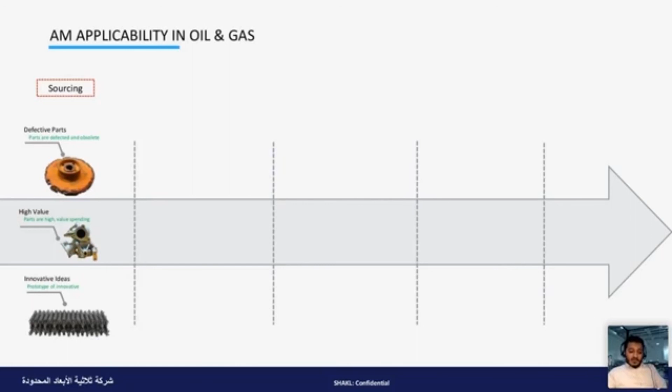and brings reliability to operation. The third item is innovative ideas, innovative solutions that the operating facilities can come up with and prototype and deploy immediately.

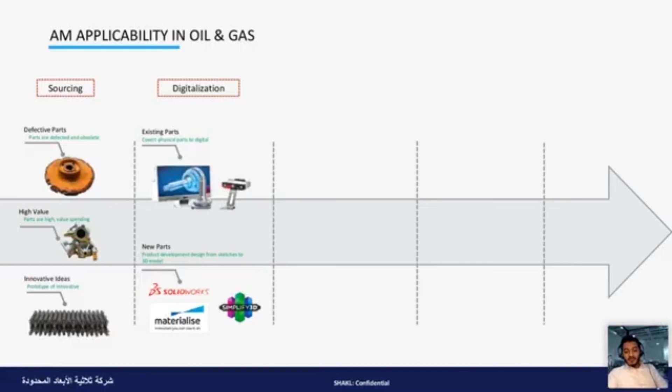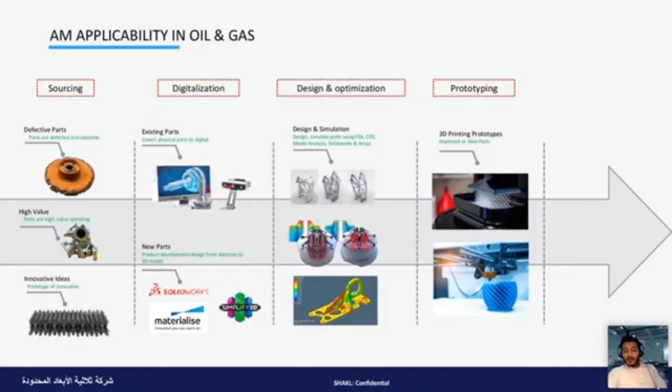Once the part identification is happening, we look at the digitalization perspective, where we scan these parts and have it in a CAD software, or we can design it from scratch if it's an idea or an invention. Also, we look at design optimization - we can apply generative design or optimize the design to be cost effective. Then we prototype these ideas with normal desktop machinery to visualize and sense the product before deployment, and finally we look at the AM fabrication of metallic and non-metallic commodity to be deployed and implemented in the field, and finally we digitize this part into the digital inventory to be produced on demand.

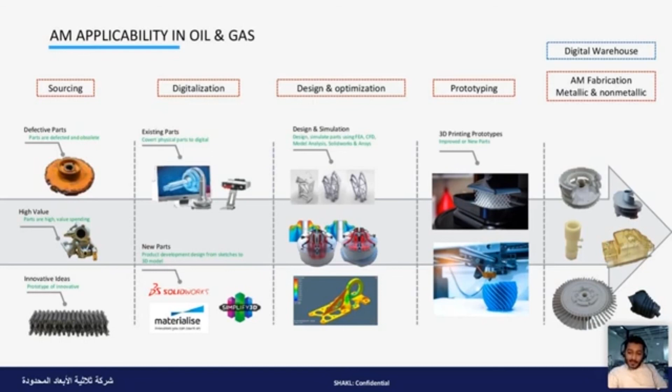Marvelous. Okay, so it's quite a lengthy chain there, really, of a lot of activity going on.

Valeria, I'm interested to hear how Aidro helps in this process, and what your approach is at your company.

Yes, indeed, we are a helper. We are helping the company to develop the digitalization and introduce additive manufacturing as a good technology to find the good solution for different problems. As I said before, we started from hydraulics, and now also we work for oil and gas and other sectors, bringing our experience from traditional mechanicals and fluidodynamics to the innovative 3D printing. And we especially work with the manufacturer.

I have a very good example to show you, because it's the example of a valve manufacturer. And I think you can see the slide.

Starting from the current inventory, what is really important is to analyze all the parts and identify which component can benefit from 3D printing. You see a typical ball valve here, very common in the oil and gas fields. And we have analyzed with the valve manufacturer which component can be redesigned and then 3D printed.

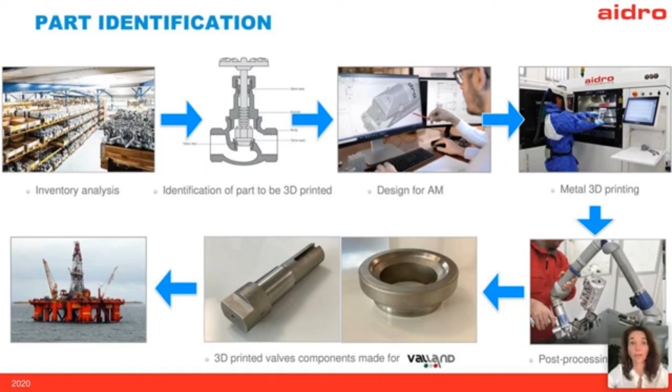So I think this can help the trust of the oil and gas company in the technology, because what is really important now is to show that the technology can work, can help, and can also be introduced without too much fear about possible cracks or defects that this technology might have.

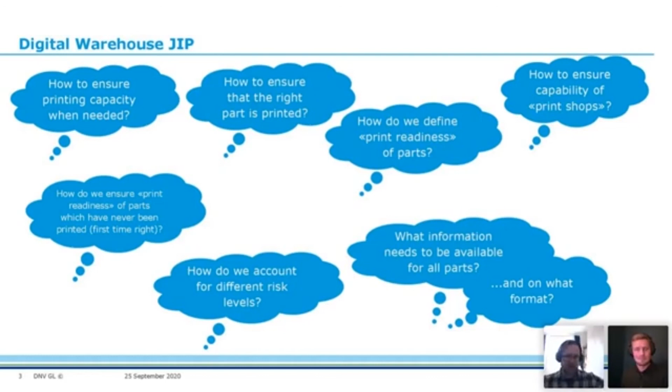Yeah, and speaking of questions, we have quite a few coming in. So let's kick off with Mohammed Youssef, who is asking, how do you pick the parts to be 3D printed? Now, who would like to tackle that question? Obviously, not everything is going to be suitable.

Yeah, Omar, I can answer that question. So there are certain requirements that you need to identify before proceeding with a 3D printing solution. You need to know what problem or what gap you're trying to bridge using the technology. Are you trying to enhance performance? Are you trying to shorten the lead time? Are you trying to prototype an innovative solution to sense and feel before mass production? Once the gap is identified, you can immediately tackle the 3D printing aspect of production.

Okay, excellent. We've got another question as well from Brian Crossy, so I think we probably should answer that question. Is one of the three types of parts, innovation, aftermarket, or high value, a particular focus at the moment? It seems to Brian that the 3D printing news is focused on aftermarket at the moment, but is that correct, do you think, or is it innovation or high value aftermarket? Which one is the current focus here?

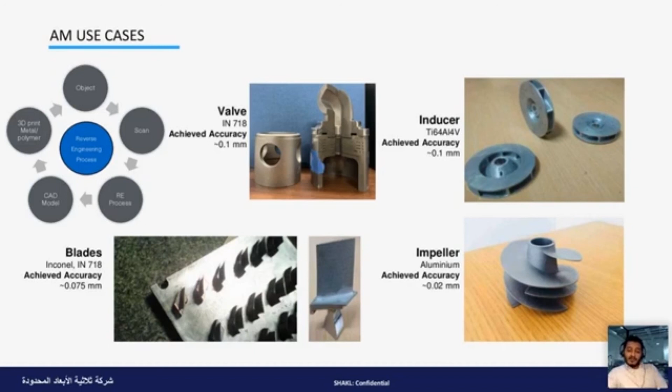So these are some of the few examples being deployed, and it's really spreading at a high scale, such as the inducer, the impeller, and the turbine blades. Yes, so these are real, serious, critical components you're actually talking about.

Valeria, do you have some examples you can show us of how Aidro are working here? Yes, I have two examples. The first one was made during the first joint industry project last year. This is a crank disc made for Kongsberg, for vessels and drilling vessels.

The idea was to test if 3D printing can produce, in a very fast way, a part that can be replaced in an old system, in this case an old thruster. We were surprised by the results because we were able to print it in only 1 week instead of almost 8 to 10 weeks of conventional manufacturing. This was a very good example because the part was made in Inconel, so it is quite heavy, but it generates the possibility to repair the old system very fast.

And the fact that we printed the part, we also have the digital file. So we can think for the future to put in stock only a digital file instead of physical parts. This means a lot of cost saving and, of course, reduction of parts in the warehouse. So this is a very good example of oil and gas parts.

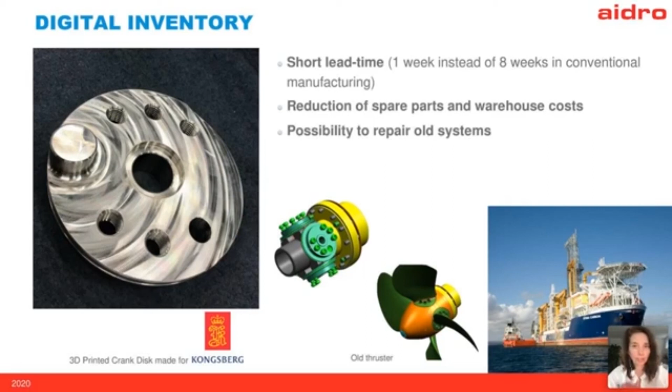And I have another part - I have to tell you that this case is a one-to-one copy of the conventional part, so in this case there is no redesign. The aim was only to replace the conventional part. Now I have a good example of a part that was redesigned.

This is a hydraulic manifold, hydraulic valve. In this case, the body of the valve is made in 3D printing in stainless steel 316L. The idea is to have the file in stock, not the real parts, and have on-demand parts. So when we receive an inquiry from the customer, we are able to produce it in a very fast way and reply to the customer.

So we don't have any minimum batch of production, so we save a lot of money and avoid having a lot of money tied up in stock. And again, we are ready to reply to our customers in a very fast way. So these are our two good examples of real parts.

Both parts are working, were machined and assembled into final parts. So I can tell you that these parts, the crank disc and the valve, are already in function - they are put in the system and everything is working fine. So this is a very good and positive answer to the question of whether 3D printing can produce functional parts and guarantee a very high quality of material.

Hopefully that should answer Carmela's question in the chat, who asked: have you evaluated the performance of these valves installed on offshore platforms?

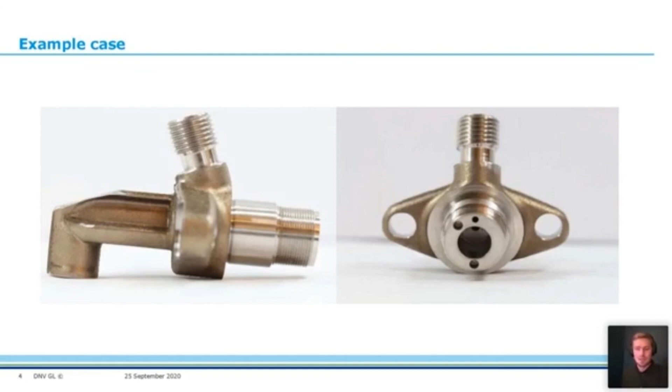And so they did, and then they sent it to us, and we pressure tested it to qualify it, and it sustained several times what it needed to sustain. I have it here as well. I think this is a brilliant example, because not only did it sustain a very, very high pressure, much more than it had to withstand for operation, but it also shows the case of obsolescence of parts, where you make them available through reverse engineering and agile manufacturing due to additive manufacturing.

And also, to top it all off, this was an improved design because of internal channels. And as the last step, it was delivered offshore by means of a drone. I like this example. So we're really living in the future there.

I think this touches on a question from Shamjif Sentanaka, apologies for my pronunciation there, who's asking if the 3D printed parts can withstand the same pressure as the original parts, and also about the lifespan of these AM components. Can you comment on that at all?

I can say yes, of course, because we already tested, for example, the valve that I showed before at around 300 bar. What's really important is to start to think that the 3D printed parts are very similar to the conventional parts, and to make a lot of tests in the conventional test bench to prove that the parts can work in the normal way. So if the design is well made and the printing has followed all the procedure and the quality assurance, at the end the part can work as well as the conventional one, or even better in some cases.

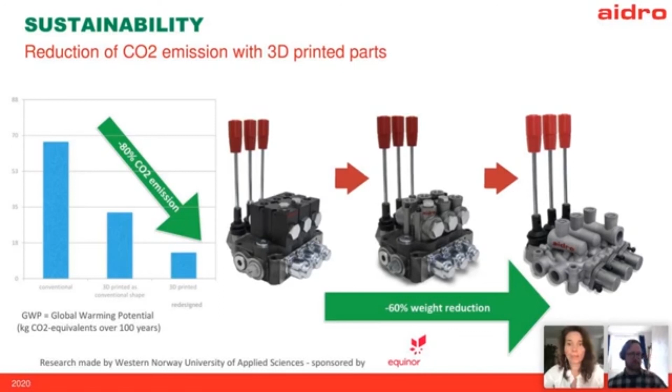And I have another very good case to show you. It's a new project - my company is working with other partners to create a circular economy ecosystem. The project was made by Fenice, an Italian startup, with the idea to recycle old spare parts, old stock, and parts coming from the decommissioning of oil and gas platforms, to use these parts as raw material for the production of metal powder for additive manufacturing. The process is atomization of the component, the scrap material. The idea is to produce powder for different additive manufacturing technologies and use this powder to make new parts. Of course, the main point is to redesign the parts to take the benefit of additive manufacturing.

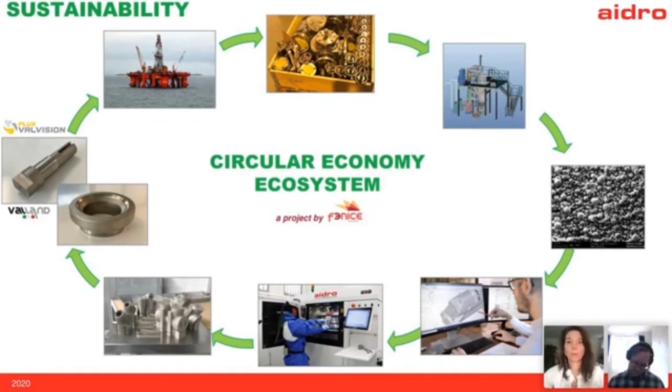At the end, with the new process, with 3D printing, we'll be able to have new parts, probably lighter and with less CO2 emission included in the process, and use these parts again in the field. So this is a very ambitious project. We are just starting on this, but I think it's a very good approach for the future - to think how to improve sustainability in the industries and how much additive manufacturing can be used to improve this approach compared to conventional manufacturing.

Yeah, I'm glad you mentioned the circular economy there, because I've seen some interesting work from a few companies, and one of them was a US company called MolyWorks. I don't know if you've come across them, but they are, again, taking scrap and bringing that back into use by atomizing it, turning it back into powder. Yes, so fascinating work.

Omar, I understand you've also been doing some interesting work in this area.

Can you talk us through this environmental monitoring example? Yes, so in an oil and gas facility, we have to collect samples from the retained seawater, and this sample collection has to be done effectively and safely for the operator.

So we've created this SLA-printed sample collector to dive deep into the water and collect samples from different layers. These samples are then tested and evaluated to ensure no contamination of hydrocarbon. It's been deployed, tested, and validated in the field as we speak, and this is one of our successful deployments of AM in Saudi Aramco.

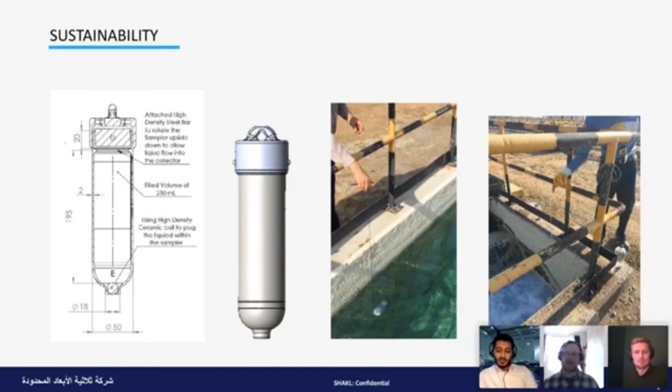Ole-Bjørn, perhaps you could tell us a bit more about the digital warehouse and specifically how that helps with sustainability here.

Unfortunately, in many ways the best thing for the environment and sustainability is to avoid producing parts. Even though the design and the products possible with additive manufacturing are amazing, they still use energy and still emit CO2. I recently spoke to an operator who told me they have a spare part inventory worth 3 billion euros, and 85% of that inventory is never used. That's a huge amount of metal and materials in general.

So if we're successful in utilizing additive manufacturing and digital warehousing in a manner that reduces lead time significantly, so that instead of storing physical parts just in case we can produce just in time, then I think the sustainable and environmental benefit from that will be immense, and also the cost savings.

We've got a lot of questions, so I'm going to rush along a little bit. One here from Loke Kudert: have you already started to qualify AM parts made with recycled powder, and with which materials?